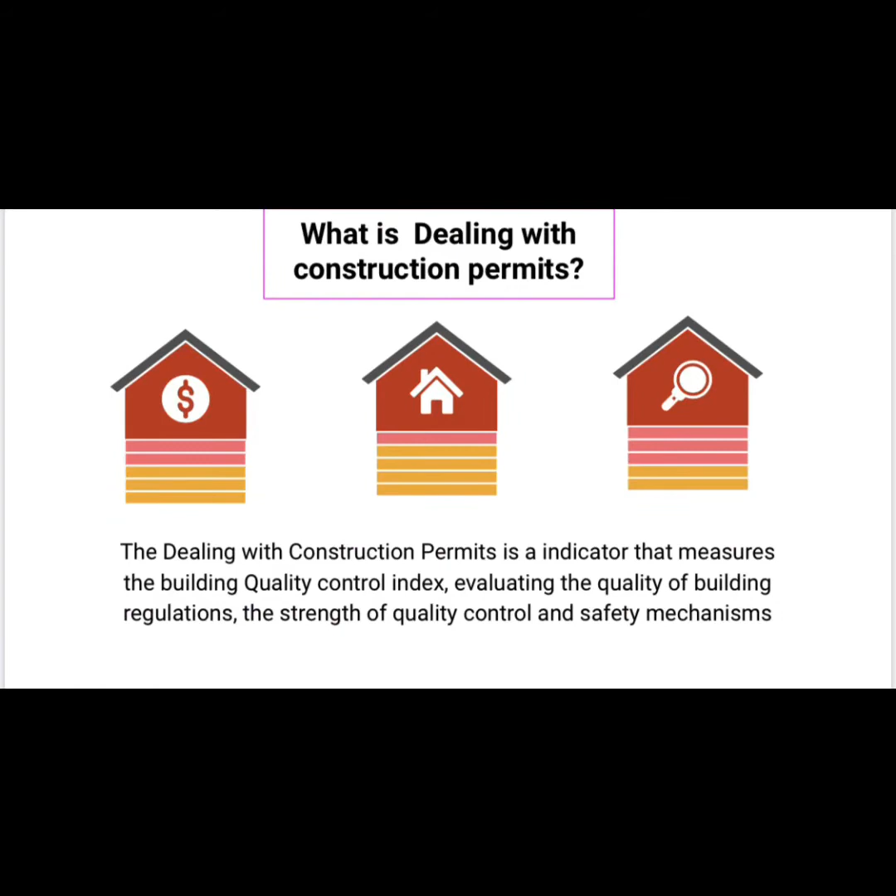In this indicator we have some assumptions, and these assumptions are a way of standardizing the problematics and the situations. Right now, I'm going to explain which are these assumptions. Okay, let's start.

In this indicator, we suppose that the warehouse is a limited liability company and operates in the economy's largest business city. Also, we suppose that the warehouse is 100% domestically and privately owned, has 5 owners, and none of whom is a legal entity. Also, we suppose that the warehouse has a licensed architect and a licensed engineer, and both are registered with the local association of architects.

Also, we suppose that the warehouse will be used for general storage activities such as storage of books or stationery. In this part, we suppose that the warehouse will be used for common activities and for many consumers and clients.

Another assumption is that the total construction area is approximately 1,300 square meters. Each floor will be 3 meters, 9 feet, and 10 inches.

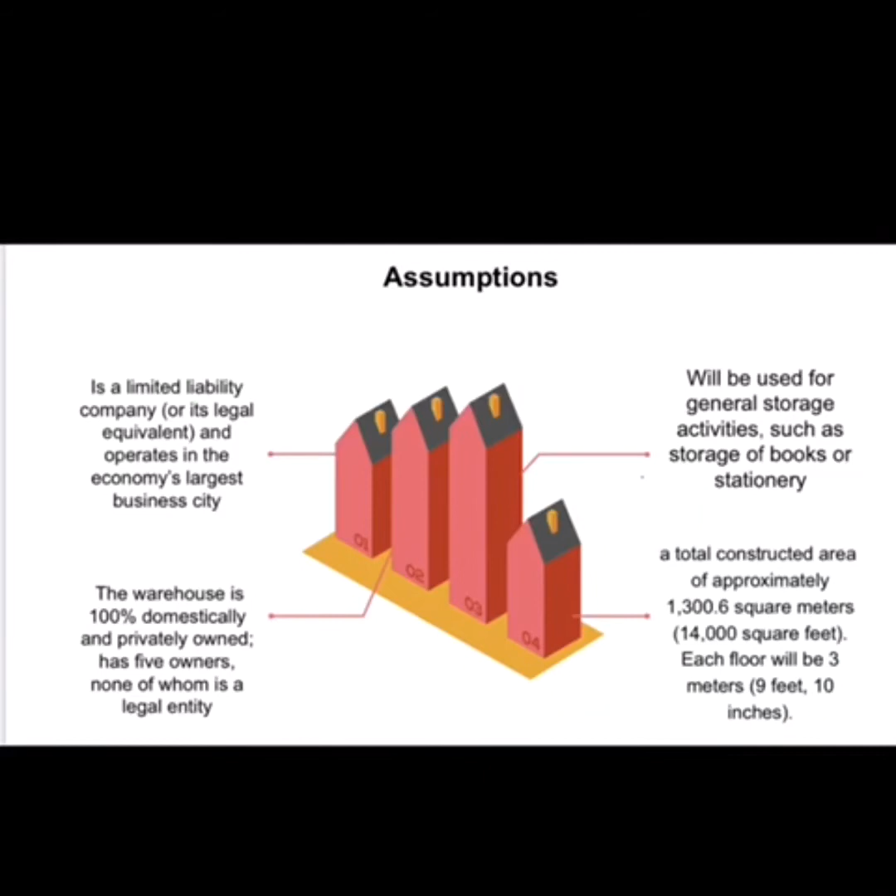In the same way, I want to mention some other assumptions that we consider important in this indicator. For example, that it owns the land on which the warehouse will be built and will sell the warehouse upon its completion. Also, it will have the complete architectural and technical plans prepared by licensed architects. And the warehouse will take 30 weeks to construct, excluding all delays due to administrative and regulatory requirements.

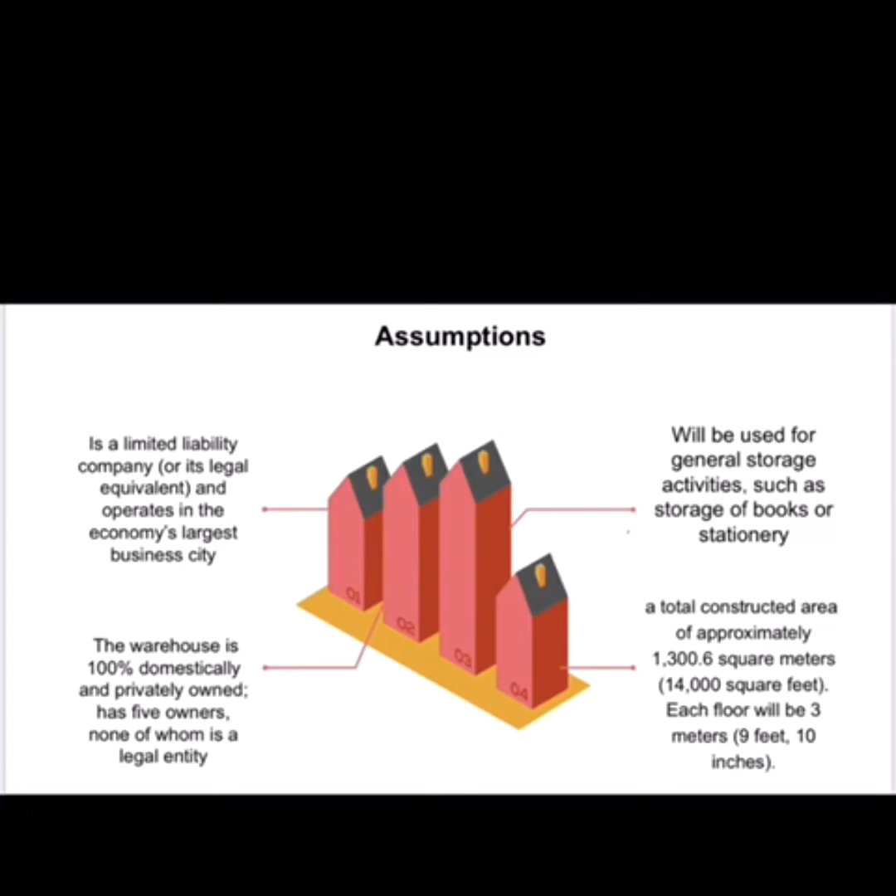Lastly, another important assumption is that the warehouse will be 150 meters from the existing water source.

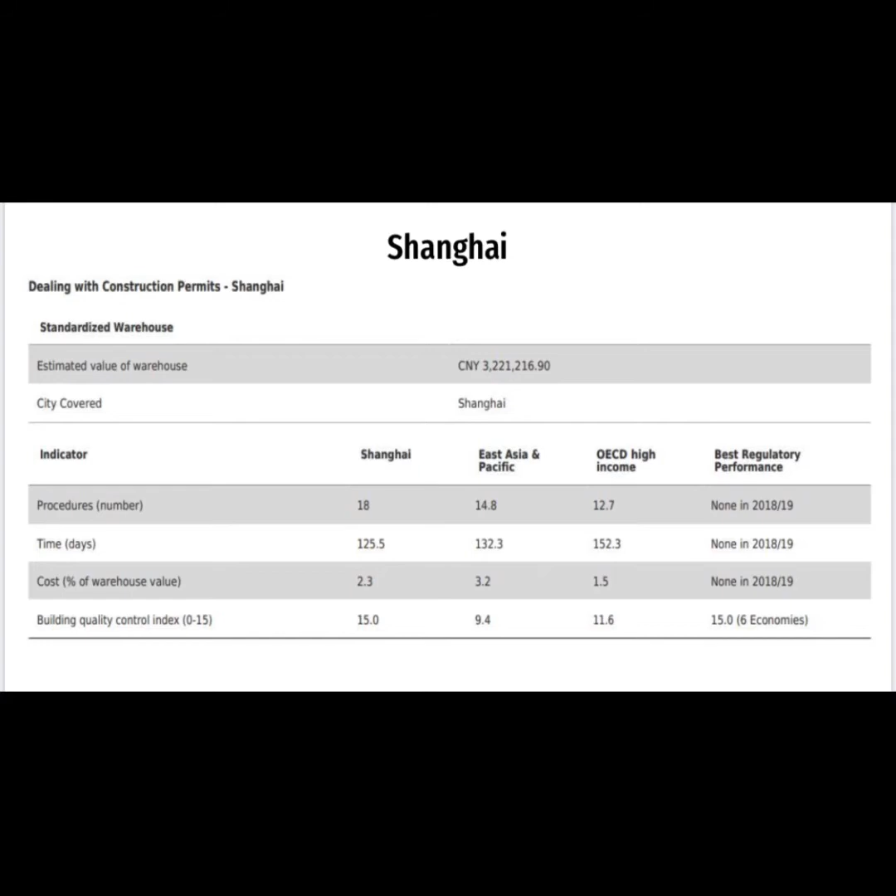Here we have a chart that talks about indicators in Shanghai, East Asia and Pacific, and OECD high income, and best regulatory performances. We can see the procedures in numbers, time in days, cost in percentage of warehouse value, and last but not least, the building quality control index, which goes from 0 to 15.

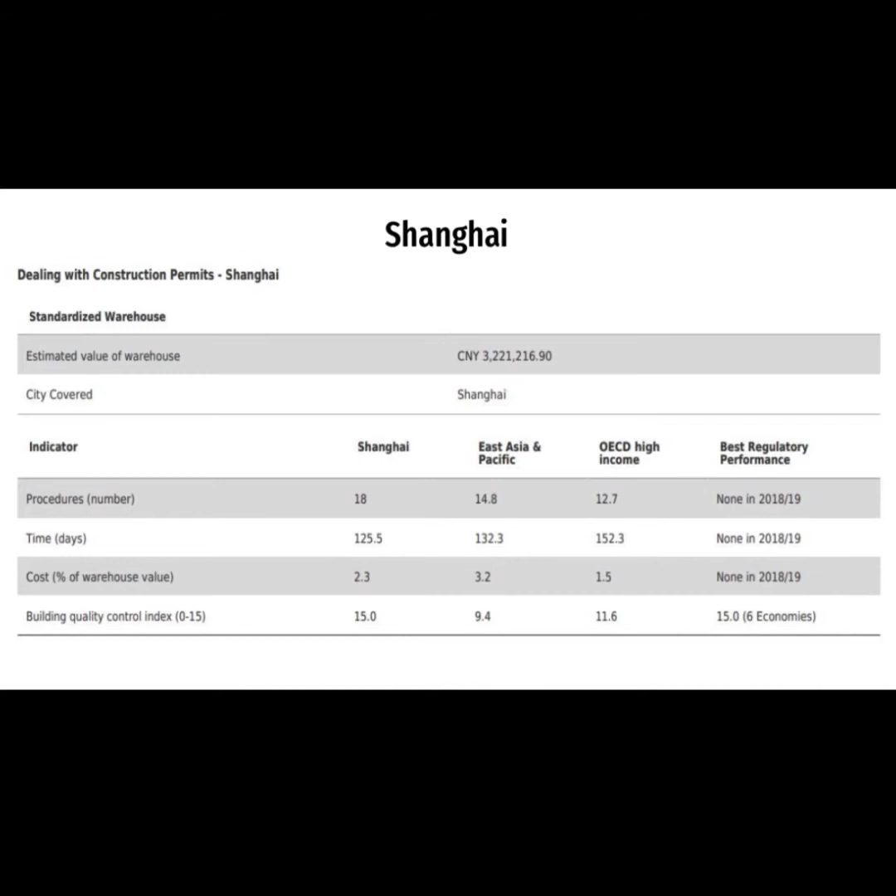Then we're going to talk about the score. In this figure, we can see the procedures, time, cost, and building quality control index. The scores in each category: procedures we have 48.0, time we have 71.3, cost we have 88.5, and building quality control index we have 100.0.

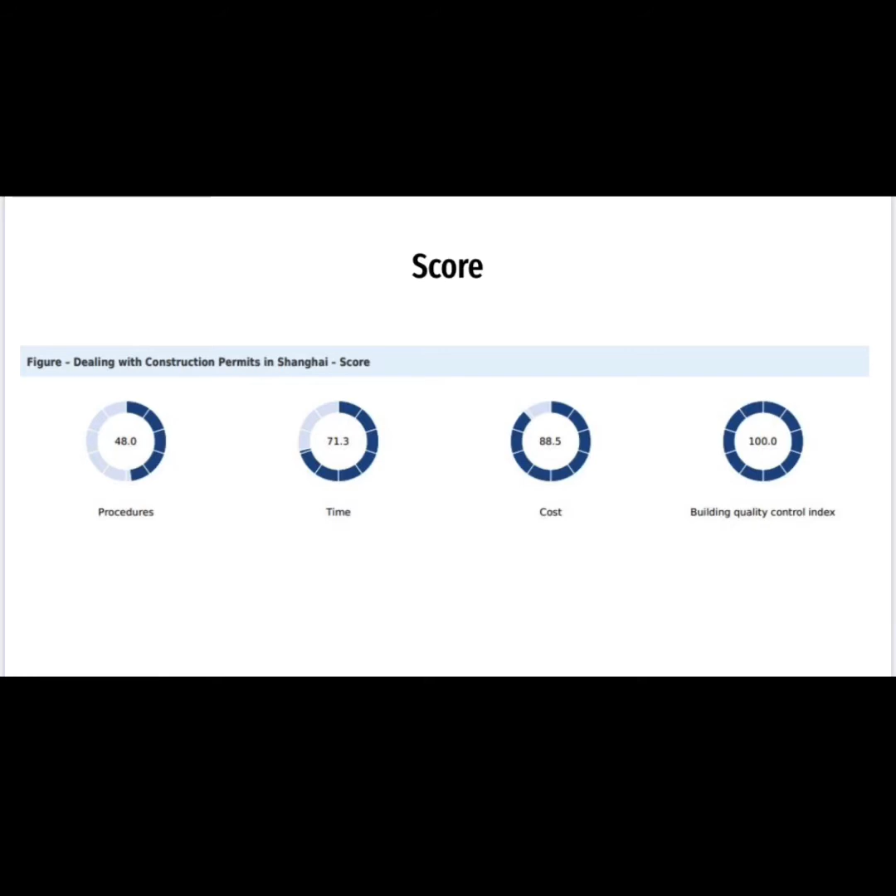Ranking in a score. The ranking of economy on the ease of dealing with construction permits is determined by sorting their score for dealing with construction permits. These scores are the simple average of the score for each of the component indicators.

So here we have Shanghai, it's 77.0. Below we have Kazakhstan, ranked 37, with a score of 76.5. And then we have rank 24, the United States, with a score of 80.0.

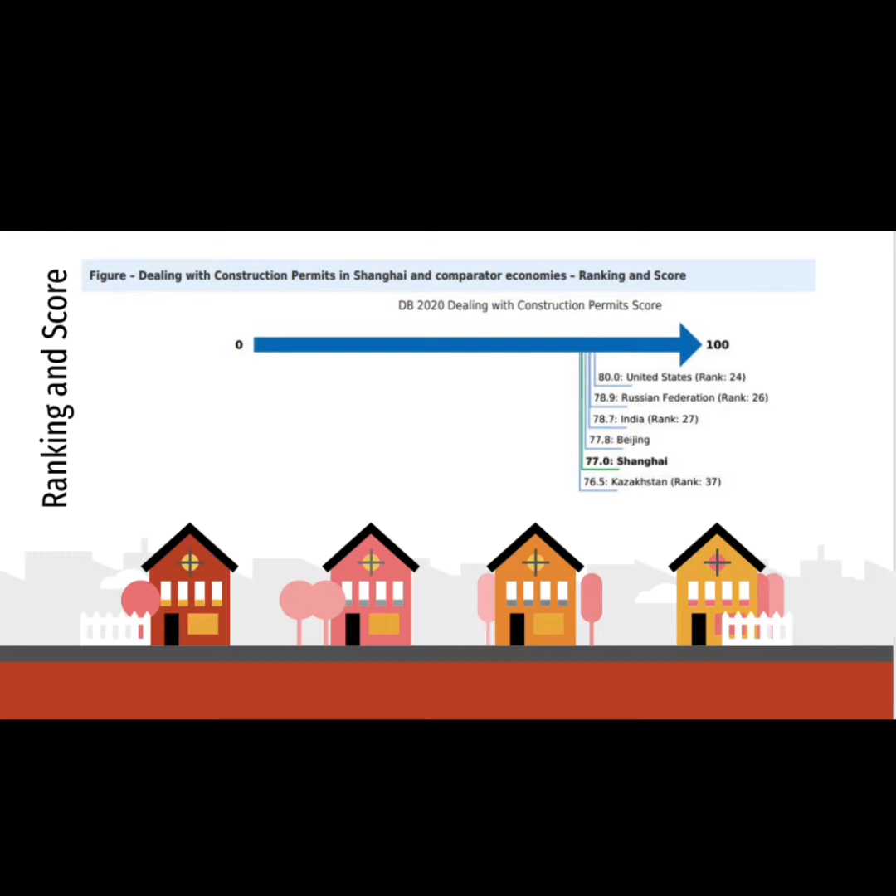This score is 0 through 100. Here we have Beijing. Beijing has 77.8. This is a little bit above Shanghai.

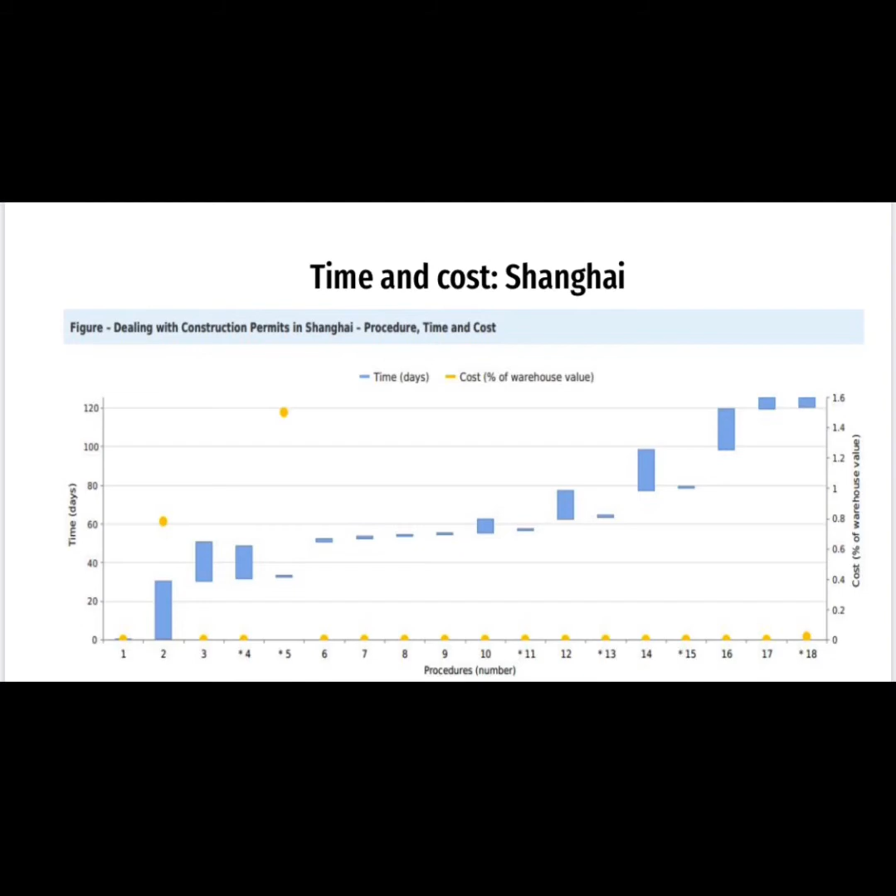Now we can see the details that explain the procedure, time and cost of Shanghai. In the first place, we have registered construction, project online through the Shanghai Construction Projects Review and Approval Management System. This takes 0.5 days. And...

The required application: you need the application form to register the project, proof of land use rights, project proposal, project construction investment estimate, topographic map of the project, comments from relevant function departments, proof of funds presented by the bank, and last but not least, a copy of the business license of the enterprise's legal representative.

Second, we have obtained a geotechnical study soil test. It takes 30 days and costs 25,000 CNY. Here, we will require a soil test for the structural calculation for the foundation.

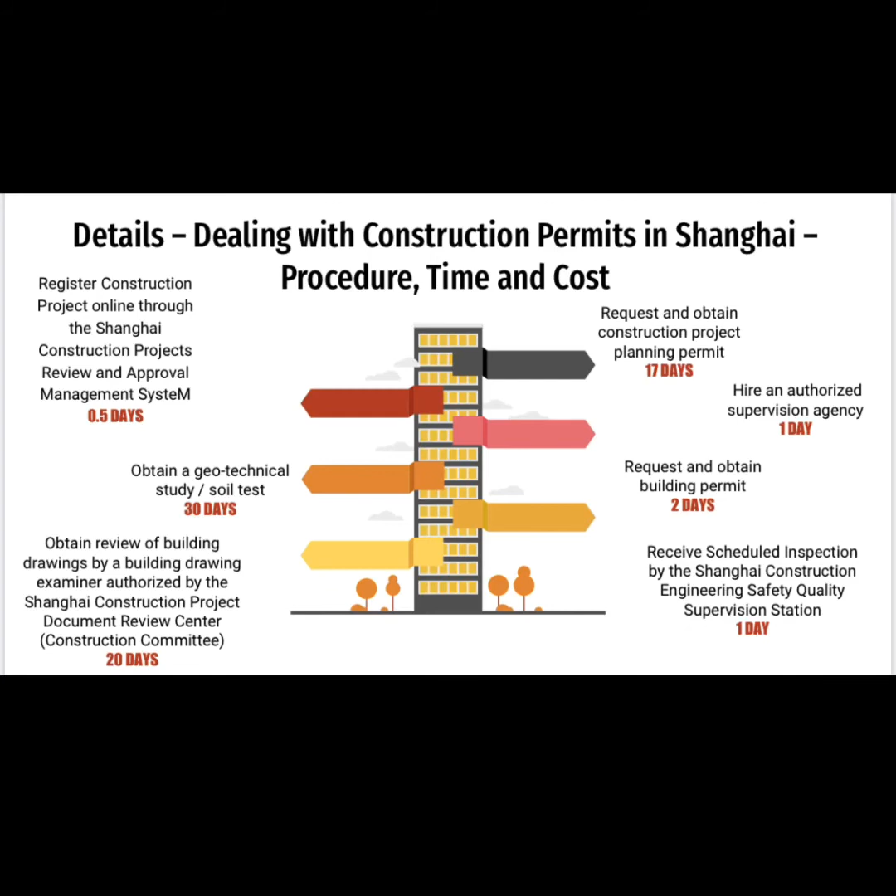Here we have the received audit inspection from the Shanghai Construction Engineering Safety Quality Supervision Station 1. This takes 1 day, and here we can see the Safety and Quality Control Station conducts several unannounced spot inspections during construction. Then we have the received audit inspection from the Station 2.

Here we have the result, and this takes 2 days, and here we have the result of the control.

Then we have the request water and sewage connection. It takes 7 days. Must first apply for a water connection inquiry from the municipal water bureau, who will approve the application within 7 days after receiving all required documents.

Then we have the received water and sewage inspection. Here it takes 1 day.

And then we have the received fire department inspection upon building completion. It takes 15 days. The application can be submitted directly to the Shanghai District Construction Commission, which now coordinates all inspections. However, the inspections are still conducted by each individual agency.

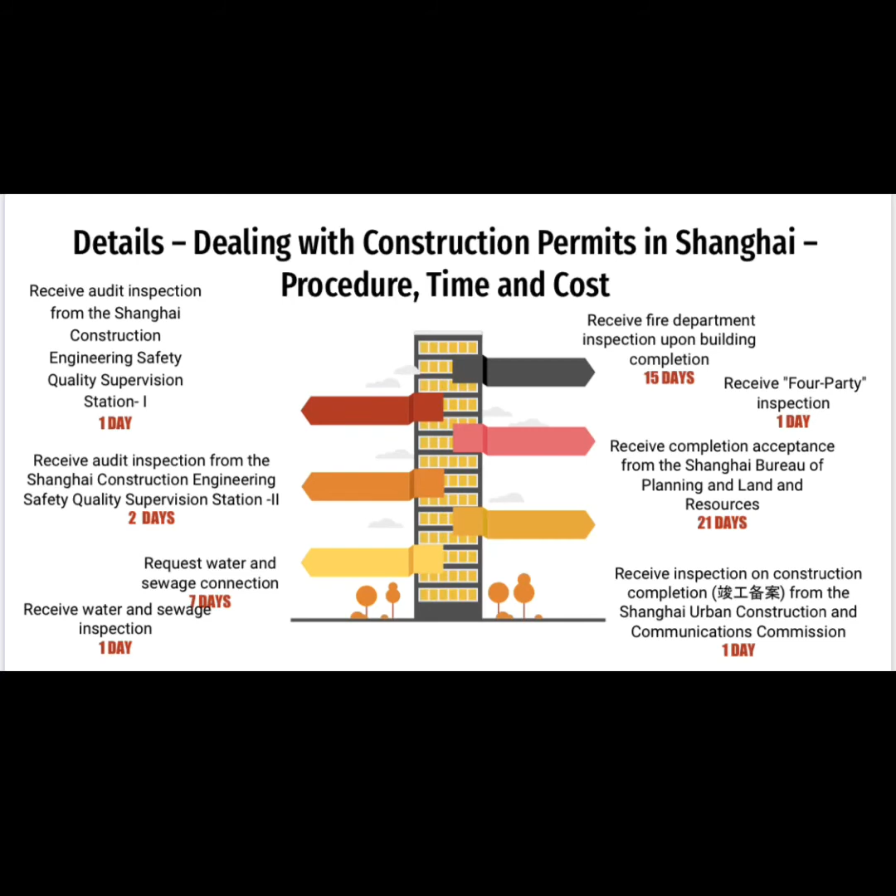Then we have the received inspection of construction completion from the Shanghai Urban Construction and Communication Commissions. It takes 1 day. This procedure must be completed on the day of the application, provided that the documents required for submission are complete.

We have 21 days that it takes to obtain certificate of completion and certificate of final inspection from the Shanghai Urban Construction and Communication Commissions.

Within 15 days after the building passes the inspection, BuildCo must file the following documents: inspection report of the complete construction, acknowledgement of authority from the Planning Bureau, absence certificate or opinion of absence of fire prevention inspection, proof of payment of engineer section, and opinion or acceptance of complete civil defense project.

Then we have the received connection to water and sewage services. It takes 6 days. And then we have registered building with real estate registry.

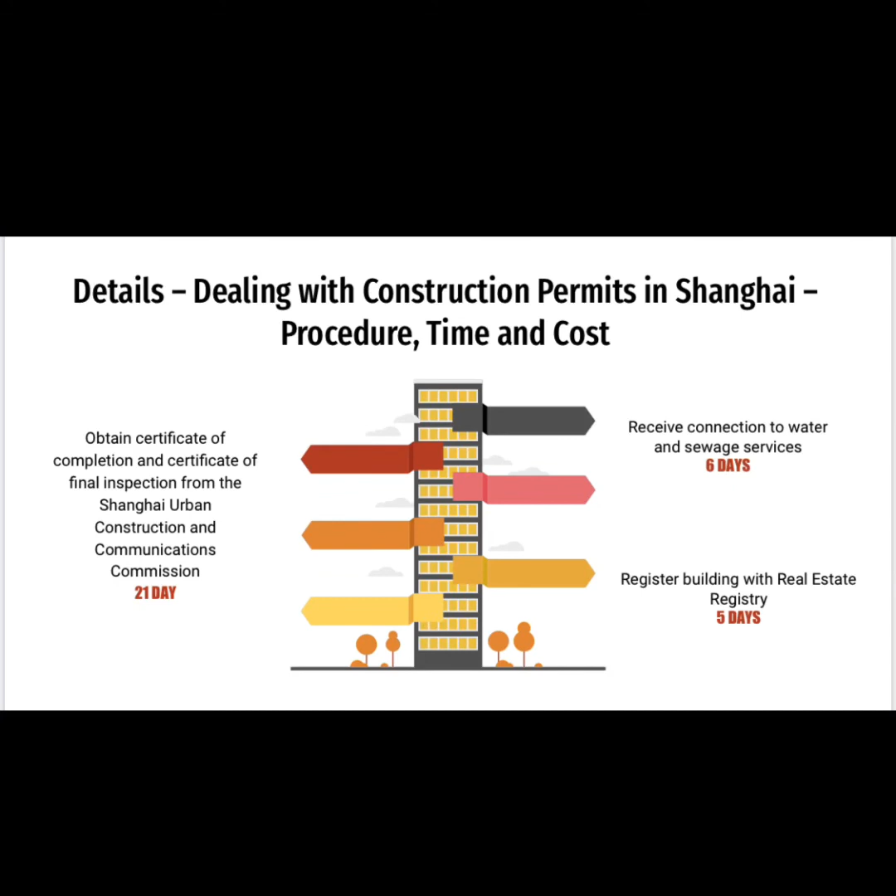Shanghai has a score of 15. In this score, we can see that Shanghai has available online, free of charge, a list of required documents, fees to be paid regarding pre-approvals. Shanghai requires licensed architects and inspection by an external engineering firm.

Mandatory inspections are always done in practice. Final inspection is done by a government agency, and it always occurs in practice. No party is required by law to obtain insurance, and this is about the construction companies.

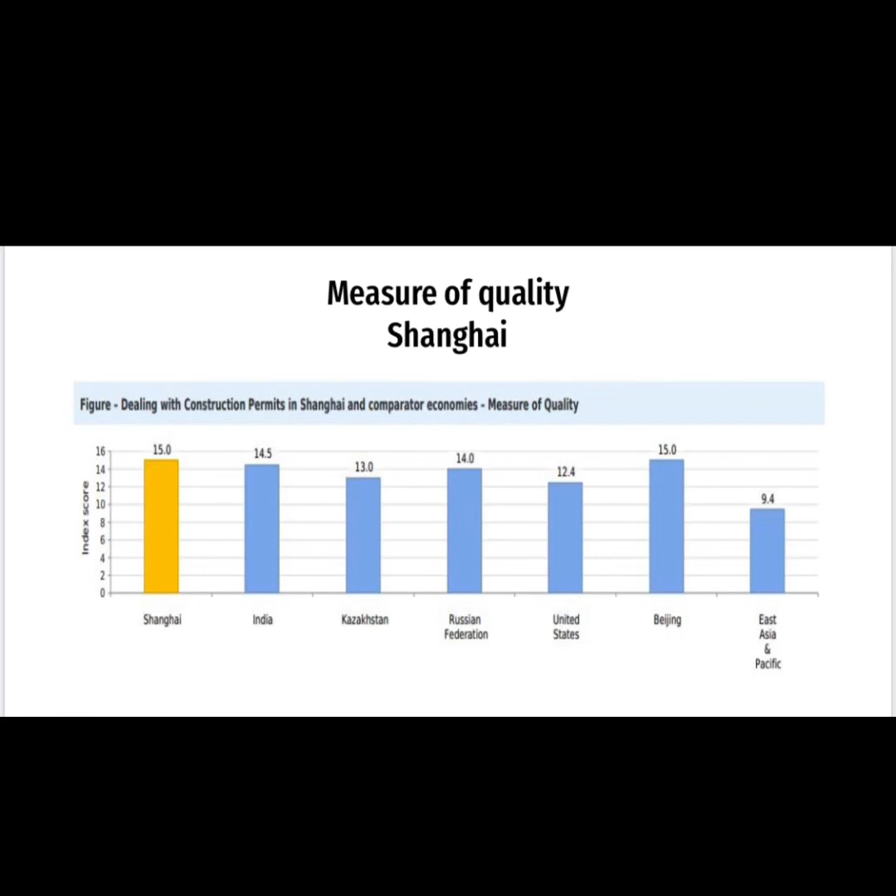Minimum number of years of experience: in the United States, a university degree in Architecture or Engineering, being a registered Architect or Engineer, and also a minimum number of years of experience are the qualification requirements for the professional who supervises the construction on the ground, for Shanghai and Beijing. Time and cost of Beijing.

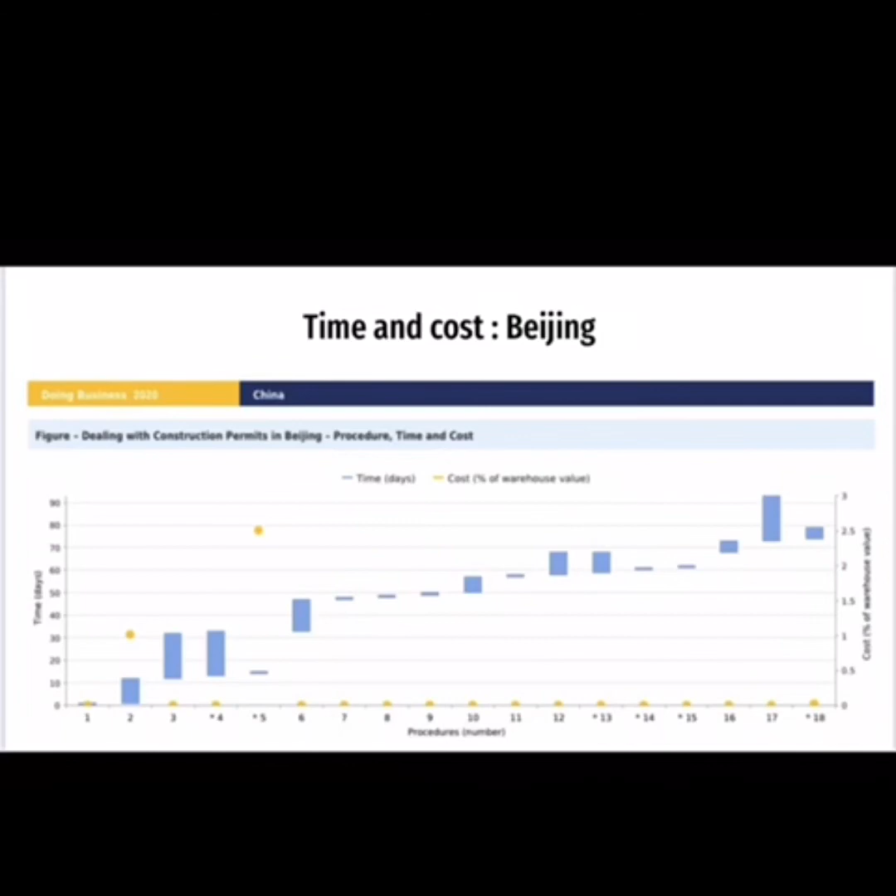In addition, we have a maximum cost of 3.5%. In the first graph, if we compare Beijing with other economies in terms of quality, we observe that it obtains the highest score, as does Shanghai, knowing that the quality indices run from 0 to 15, with 15 here. The second best score is India.

In conclusion, we can say Beijing has good quality for construction, but this indicator has a few components that we are going to discuss at another moment.

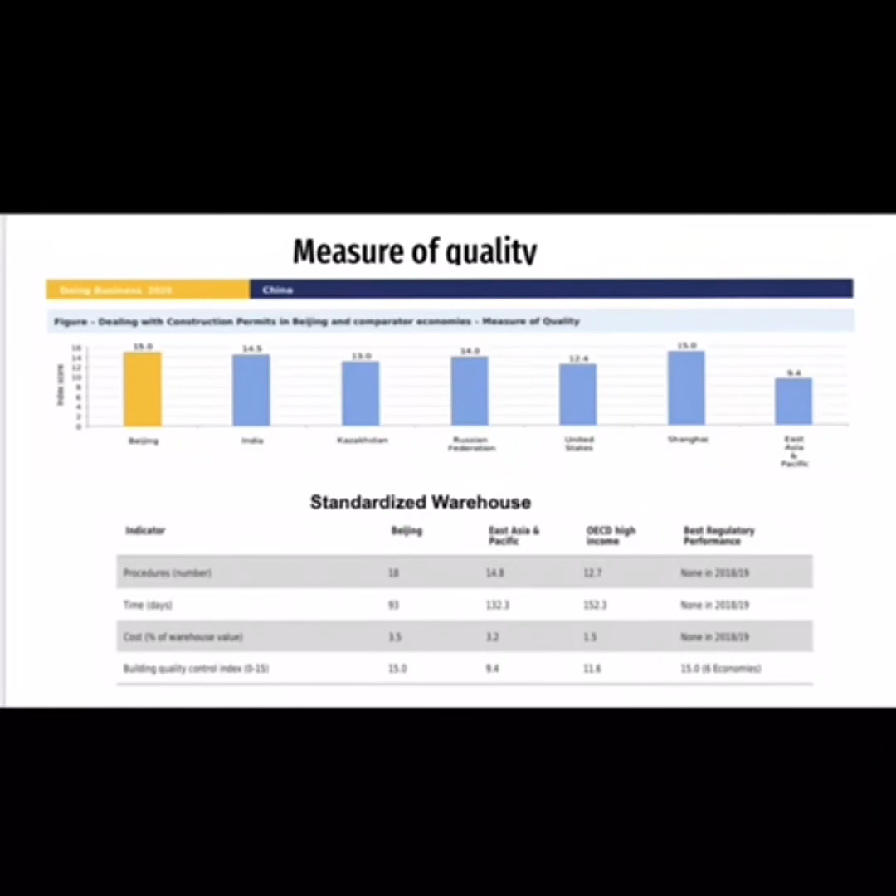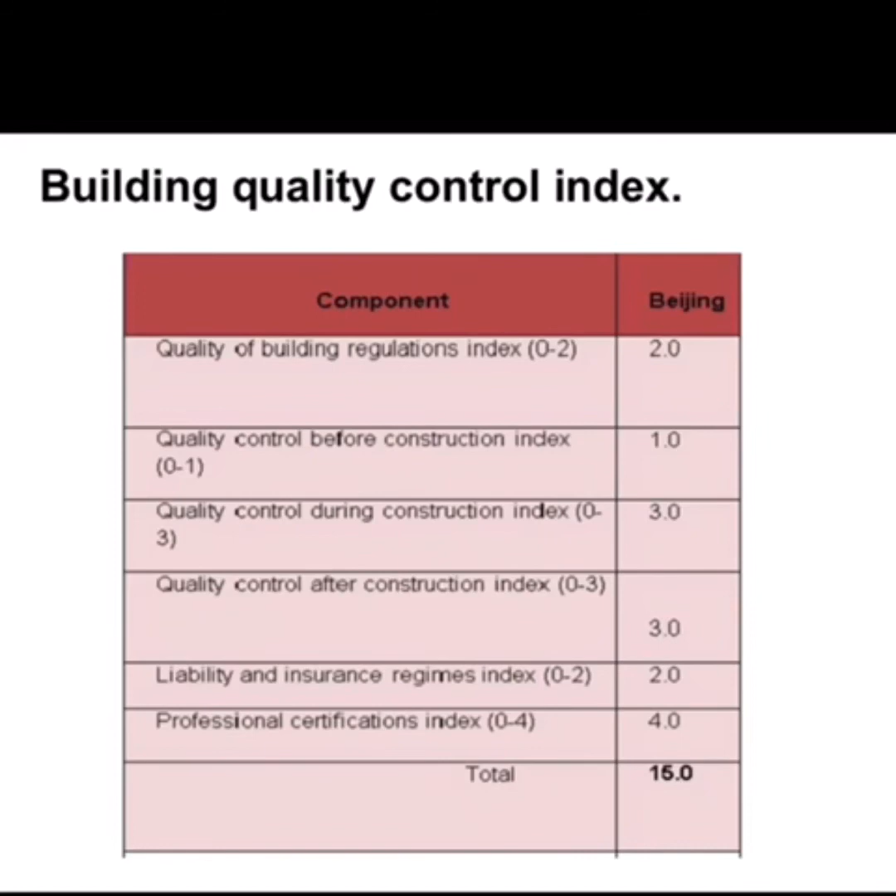For example, how accessible are building laws and regulations in your economy? Another question could be which requirements for obtaining a building permit are clearly specified in the building regulation or any other accessible website. These are several questions used to determine a high score.